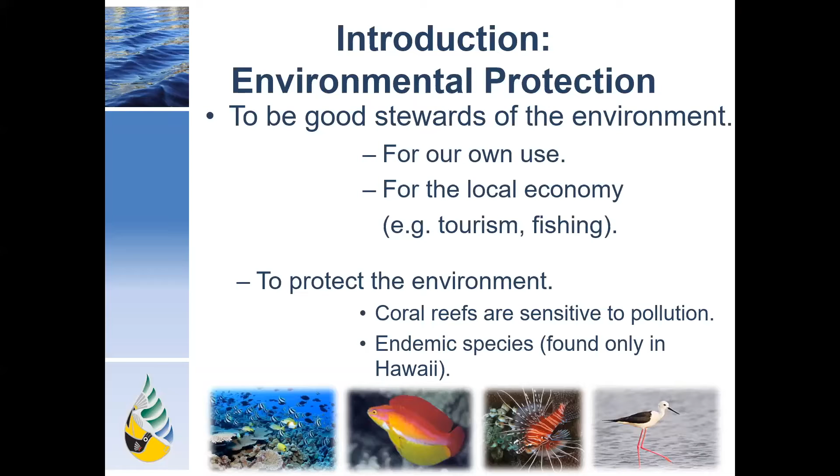It is important for all of us to ensure that best management practices are properly implemented to minimize the potential pollutants generated during construction and post-construction activities, and to prevent them from entering our state waters. Clean water is of vital importance to our use, as well as to the fishing and tourism industry. It is our responsibility to protect wildlife and species found only here in Hawaii. Our ultimate goal is to ensure that our coastal waters are clean for every living being to enjoy.

Here is a quick rundown of our basic regulatory requirements at Harbors, which include the Clean Water Act and related CFR by feds, Hawaii Administrative Rules 11-54, 55, and related statutes, and the NPDES permit issued to Harbors Division as of today. These regs and permits, along with the consent decree, are the primary drivers for Harbor's SWMP program.

The NPDES permit issued to Harbors requires the development, implementation, and enforcement of our own SWMP, covering the 6 minimum control measures listed on this slide. Today's training will be focused on construction site runoff control and post-construction stormwater management for new development and redevelopment. Both program manuals are available online, and here is our web address.

Also, you can find it in our booth listed under this virtual conference. Showing below is a snippet from our website listing the menus, checklists, and forms tailored for Harbor's construction and post-construction programs.

Following the definition in HAR 11-55, construction activities are any activities that disturb the land, including but not limited to clearing, grading, and excavation. It also includes construction supporting activities such as stockpile, borrow areas, and staging sites.

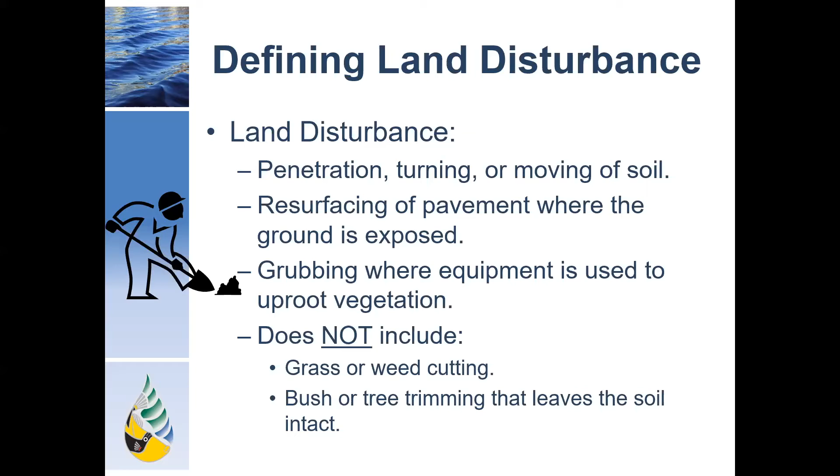Land disturbance means penetration, turning, moving of the soils, or resurfacing of pavement with exposure of the base course. This may include construction roads, staging areas, stockpiling, grading, grubbing, and demolition. Please note that this does not include grass cutting or tree trimming.

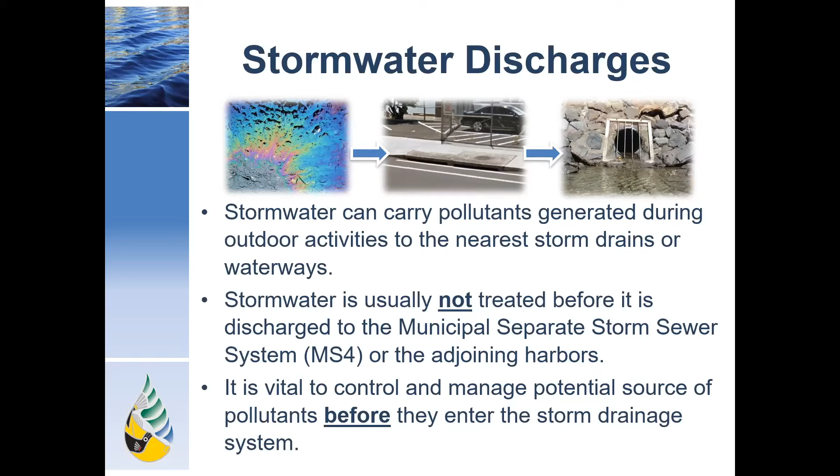So how exactly can construction activities potentially impact the environment? This occurs when stormwater runoff carries pollutants from the construction site to nearby storm drains or waterways. Once the stormwater has entered the storm drain system, it flows and discharges directly to the adjoining state waters, for example, harbors. Therefore, it is essential to control and manage the potential sources of pollutants before they enter the storm conveyance system. One potential source of pollutants is what is called an illicit discharge.

An illicit discharge is any non-stormwater discharge that can pose a risk to the environment. An easy way to remember is that only rain belongs in the drain. The picture on the slide provides some examples of illicit discharge that should be eliminated, such as oil sheens or washed paint product and sediment.

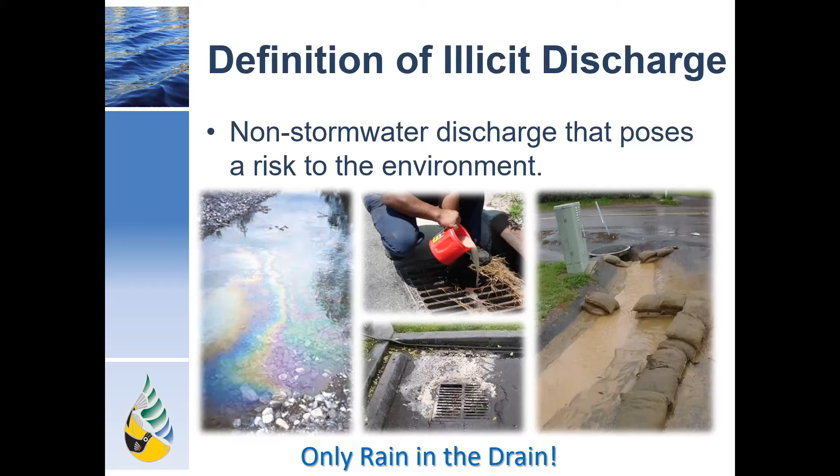Common pollutants from construction sites can include sedimentation from erosion and excavation, vehicle fluids from equipment used on site, and chemicals and aggregates stored on site. Also, some other waste from portable toilets, concrete washout, and littering.

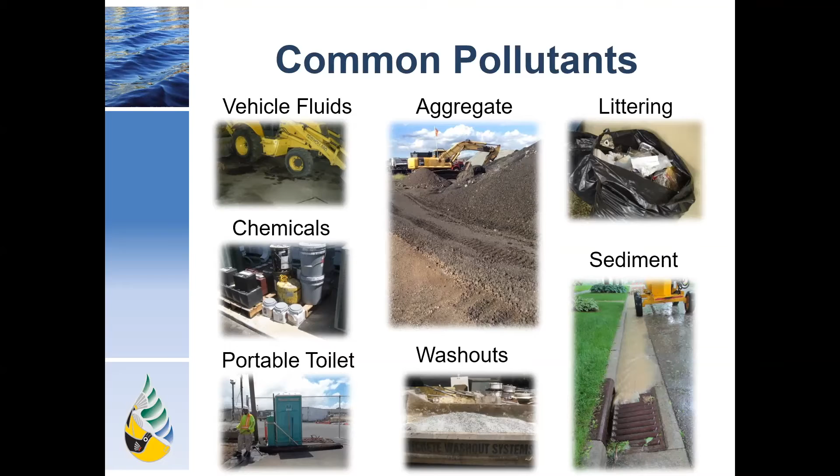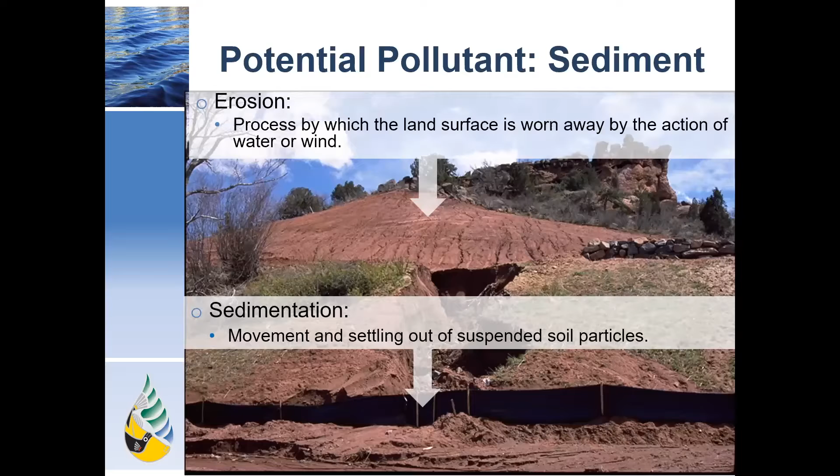Sedimentation is one of the most common pollutants found in our waterways. It can be generated through surface soil erosion or in situ soil excavation. A construction project may have both short-term and long-term impact to the environment. Without proper BMP implementation, a significant amount of sediment can be discharged - that is about 35 to 45 tons per acre per calendar year versus only 1 ton for well-grassed areas.

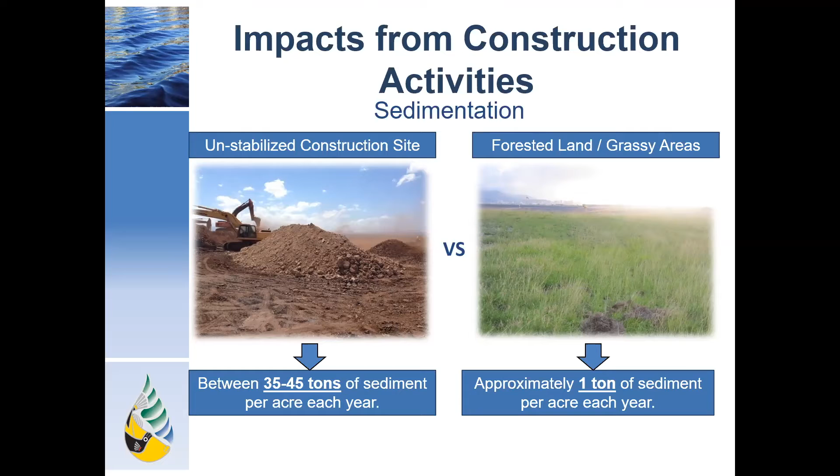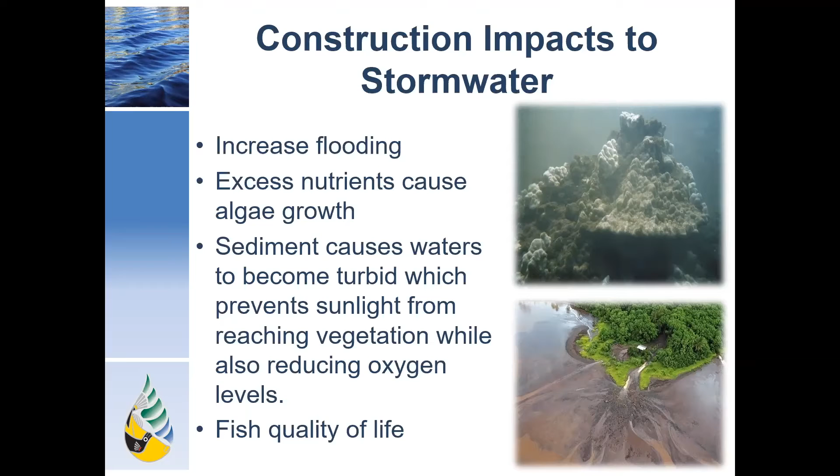If not properly contained, sediment may fill up storm drains and catch basins, which are designed to carry stormwater away from roadways and the ground surface, causing localized flooding. Also, excess nutrients from the sediment can increase algae growth. It can also cause the water to become turbid, preventing sunlight from reaching corals and reducing oxygen levels, which can impact marine life.

As discussed in one of the previous slides, the NPDES program is part of the Federal Clean Water Act, and its overall goal is to regulate the discharge of pollutants from point sources, and now also including non-point sources, to the receiving waters of the United States.

In our state, its administration has been delegated to DOH under HAR 11-55. If your project would disturb 1 acre or more, or is part of a larger common plan of development or sale, it's very likely that your project would be subject to this program requirement.

HAR 11-55 Appendix C outlines the requirement for a regulated construction site. First, no later than 30 days prior to the start of construction, a Notice of Intent Form C, or NOIC, with a SWPPP must be submitted to DOH via the e-permitting portal.

This requirement is usually completed during the project design phase. Upon awarding, the contractor shall review and update the SWPPP and submit a copy to Harbors for review and final acceptance. Then, following the permit issuance, the project owner or duly authorized representative must notify DOH Clean Water Branch no later than 7 calendar days before the start of construction activities.

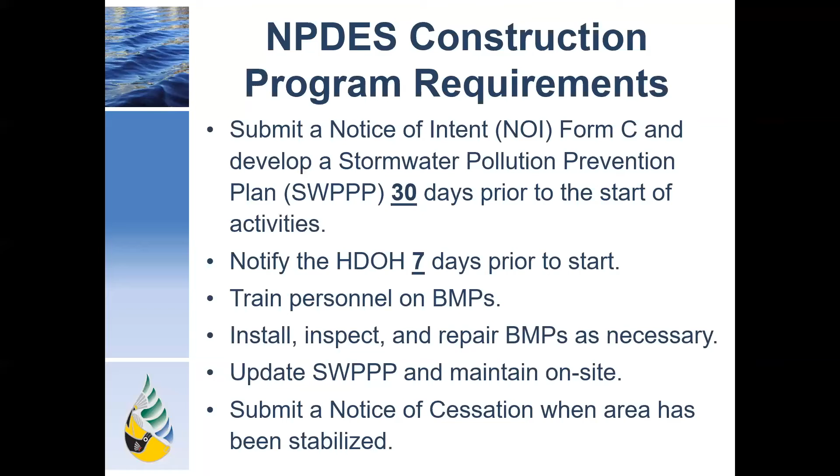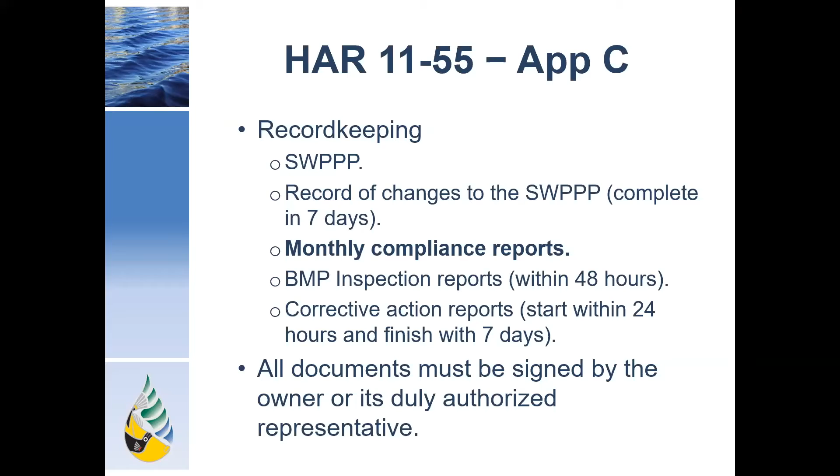When it comes to record keeping, the permittee must keep all necessary documents on site, which includes an NPDES permit, the SWPPP, records of changes to the SWPPP, a monthly compliance report, contractor's self-BMP inspection report, and the corrective action report, if any. All these documents must be signed by the duly authorized representative. Just remember, record keeping is key.

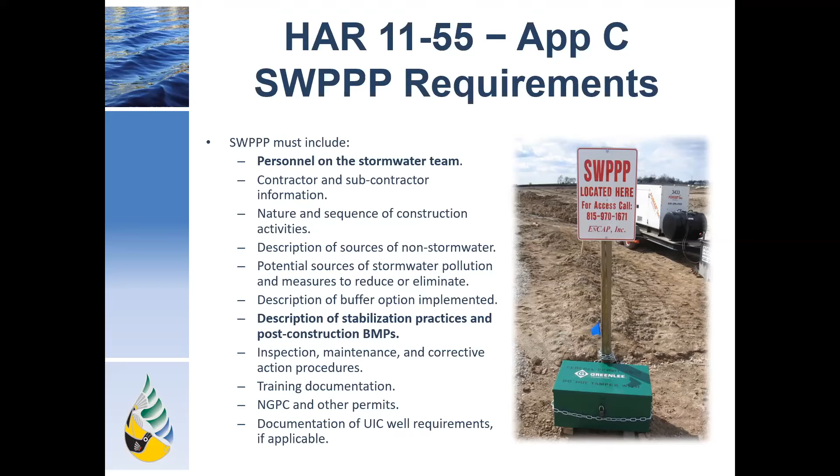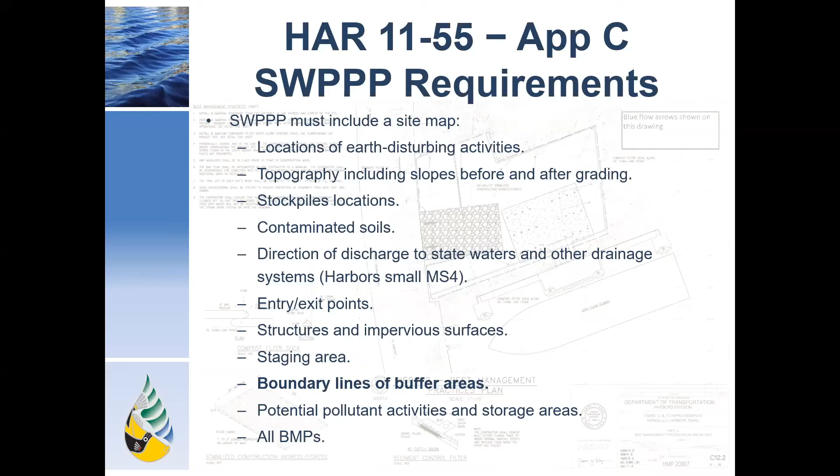HAR 11-55 Appendix C also outlines specific requirements to be included in the SWPPP, such as the ones shown on these slides. A site map should detail the locations of potential pollutants, such as disturbed earth, stockpiles, and staging areas, which could be used for equipment and chemical storage. There's also a relatively new requirement to indicate the boundary lines for the buffer area.

HAR 11-55 Appendix C also details how frequently a contractor must conduct self-inspections. First, you must determine whether the stormwater from your site discharges to impaired water bodies or not. If so, such as a portion of Honolulu Harbor, the inspection must be performed once every 7 days and within 24 hours of any rain event of a quarter-inch or more over a 24-hour period.

This means that the stormwater team is required to monitor and record the daily rain gauge readings on site, or from the nearest NOAA weather station, which is available online.

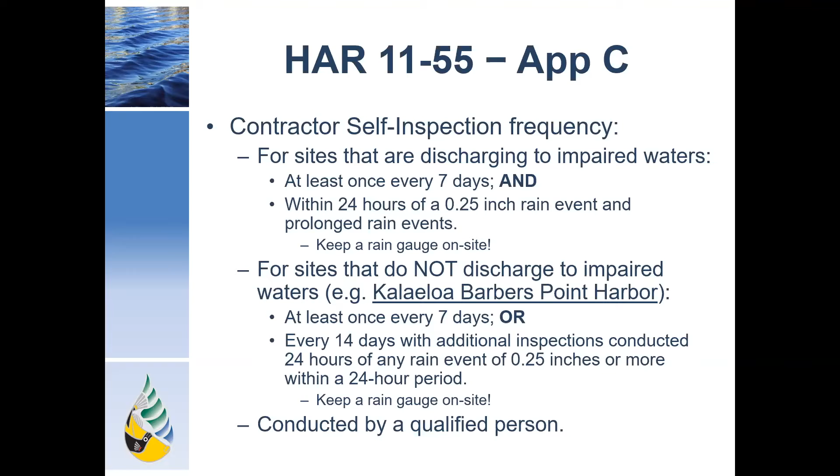If the site is discharging to a non-impaired water body, such as Kalaeloa Barbers Point Harbor, inspections are required to be conducted either weekly or once every 14 days, with additional inspections conducted within 24 hours of any rain event of a quarter-inch or more that occurs within a 24-hour period.

11-55 also has specific requirements for correcting deficiencies or potential violations that could lead to a violation of water quality. The deficiency is required to be corrected immediately within the same day it is observed. If the deficiency cannot be corrected immediately, the reasons for the delay must be documented.

If significant repairs are required, the time frame can sometimes be extended to 7 days. You will also need to complete the corrective action report within 7 calendar days from the time of discovery.

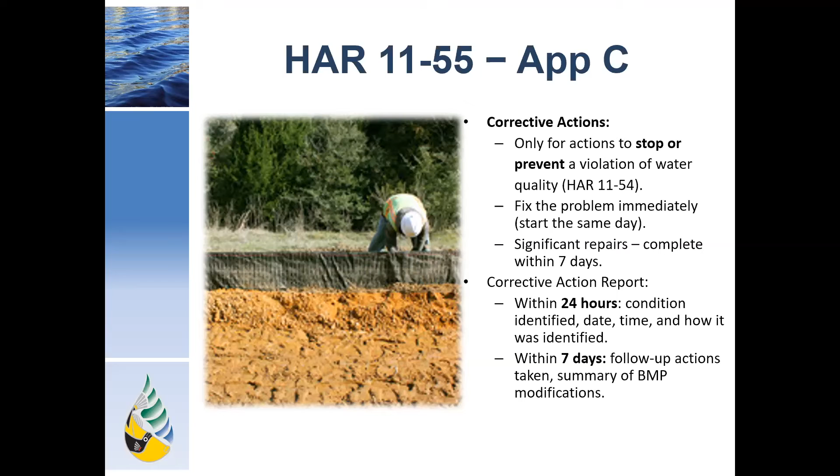DOH also requires that stabilization measures be implemented immediately whenever earth-disturbing activities have stopped. The stabilization must be completed within 14 days when it has initiated. But if the work is near an impaired water body, such as Honolulu Harbor, then it needs to be completed within 7 calendar days.

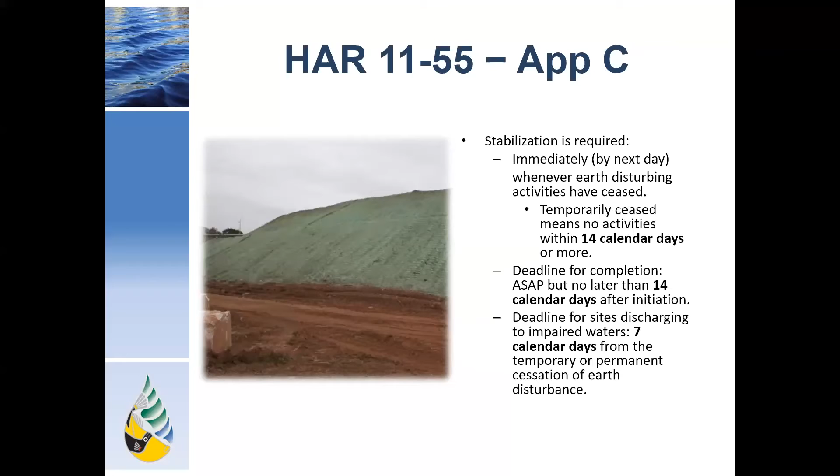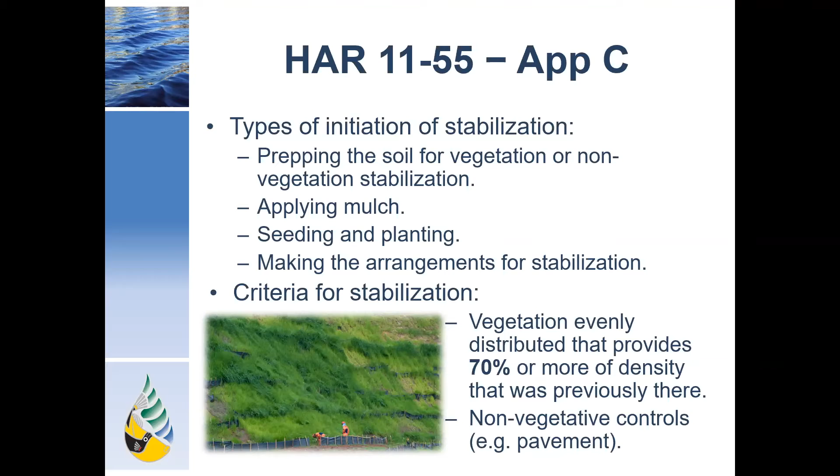Any circumstances that prevent this project from meeting this requirement should be documented. The time frame for stabilization does not mean that the seed has to grow within 7 calendar days, but steps should be taken to initiate the stabilization, which include preparing the soil for vegetation, applying mulch, seeding, or just making arrangements for stabilization.

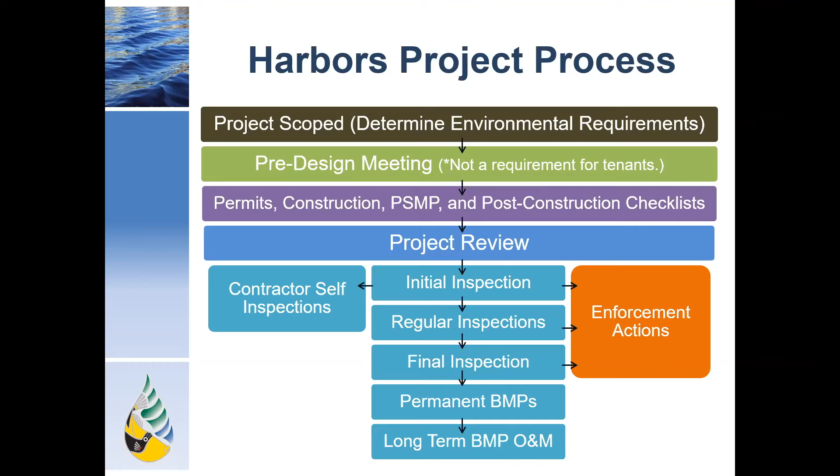A typical project under Harbor's jurisdiction will follow the process shown on the slides: project scoping, design, project review, construction, and then long-term operation and maintenance if necessary. We will review these phases in detail in the next few slides with a focus on environmental requirements.

During design phase, the project shall be scoped by the design engineers, and the relevant environmental requirements will be identified. When necessary, a pre-design meeting will be held, and all permits and applicable Harbor's forms should be completed by the design engineer.

These forms include notification forms for projects less than 1 acre, and for projects subject to NPDES and NOIC, the design engineers would need to complete the construction design and post-construction design checklists, along with a post-construction stormwater mitigation plan.

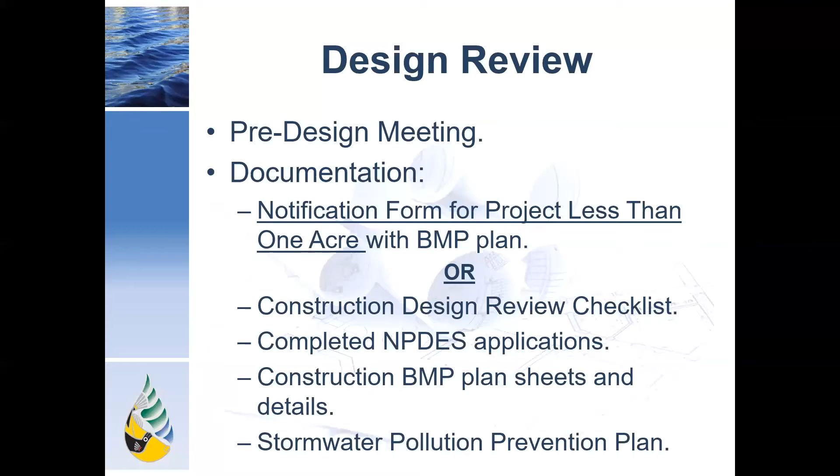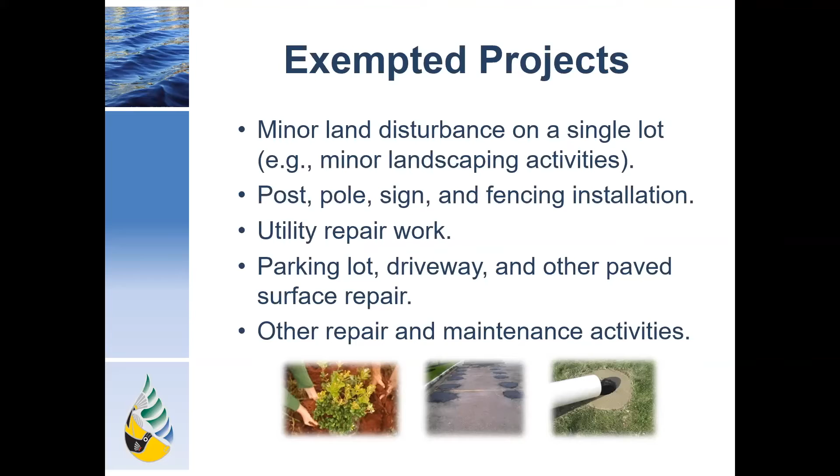Harbors have exempted certain types of projects from the program that have shown to have minimal impact to the environment. This includes some minor land disturbance on a single lot, post, pole, sign, and fencing installation, utility repair works, surface repair projects, and other maintenance activities.

Here is a snippet of Harbor's construction site design review checklist, which is available on Harbor's stormwater management website.

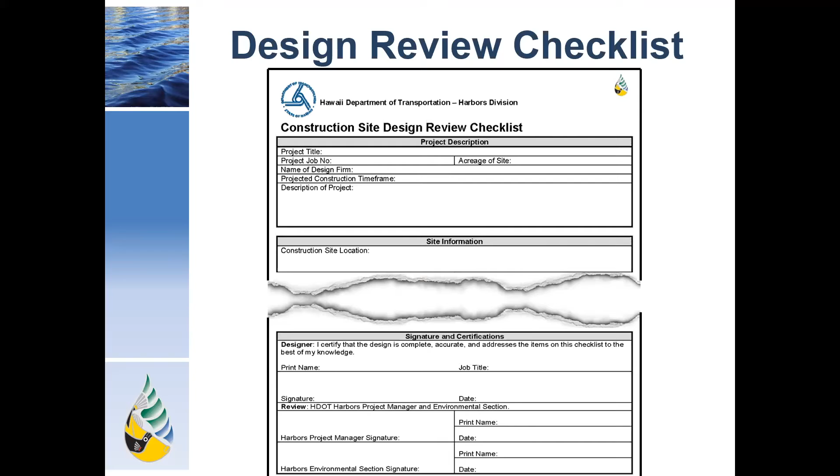Following the completion of the design phase, the project will go out for bid through public solicitation. Following the selection, the construction contractor would then work on updating and finalizing the SWPPP based upon their specific information and construction means and methods.

The revised SWPPP shall be submitted to Harbor's project manager or project engineer, who will then provide the SWPPP to Harbor's environmental section for review. Once accepted, the contractor can commence installation of BMP measures, which must be inspected for full acceptance before any other construction activities are allowed to start on the site.

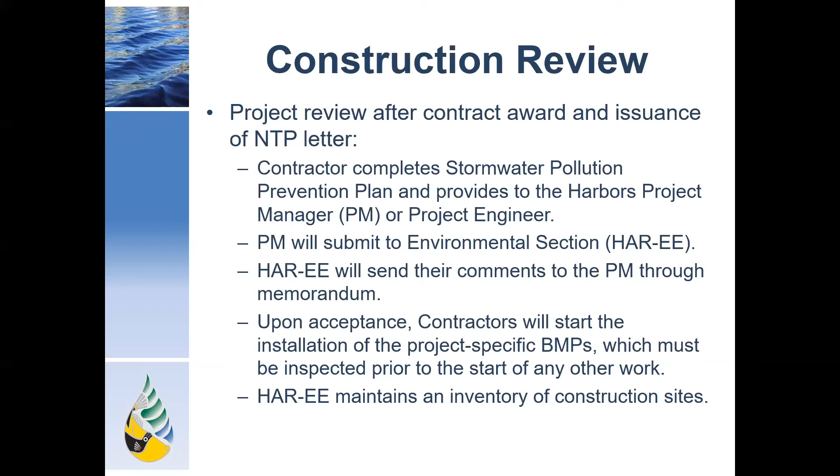If a project disturbs 1 acre or more and requires an NPDES permit, the SWPPP needs to be prepared fulfilling the requirements of R11-55 Appendix C as well.

BMPs are required to be implemented during construction activities in order to minimize impact to the environment by managing and controlling potential pollutants at their sources. They are structural devices or systems, or just procedures and practices, used to mitigate the discharge of potential stormwater pollutants. It's important to keep in mind that drain inlet protection is your last line of defense, so additional BMPs should be implemented to assist in preventing illicit discharge from occurring.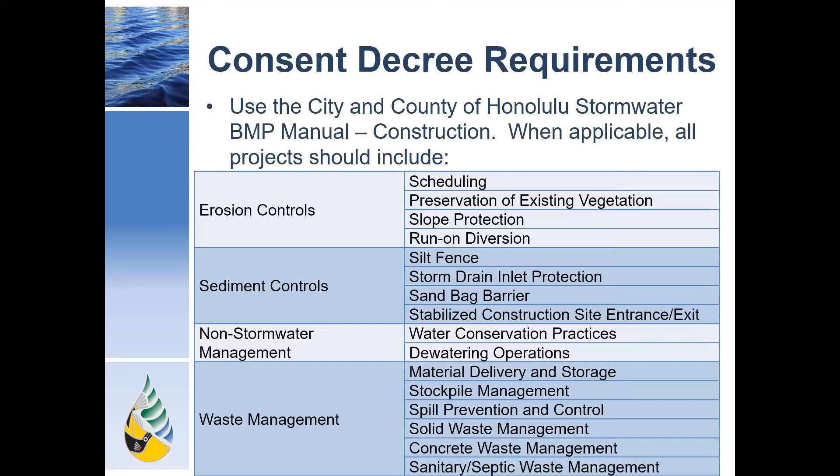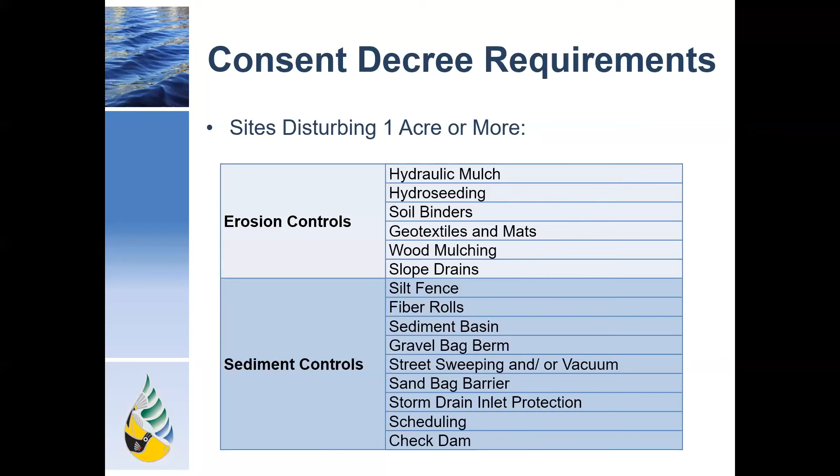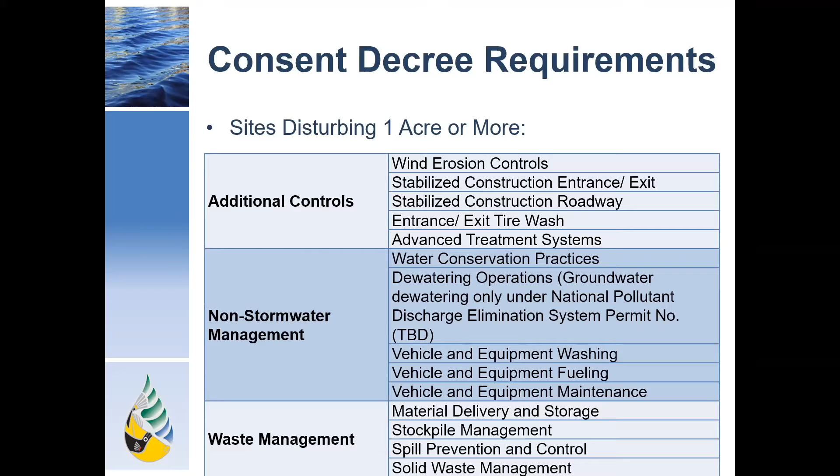Our program also includes a list of BMPs to be implemented on site for projects that disturb 1 acre or more, such as sediment and erosion control BMPs listed on these slides, and some additional control BMP measures, such as wind erosion control and utilization of advanced treatment systems, and also other non-stormwater and waste management practices.

If you're working on a roadway paving or repair project, please ensure to implement the BMPs listed on this and the next slides.

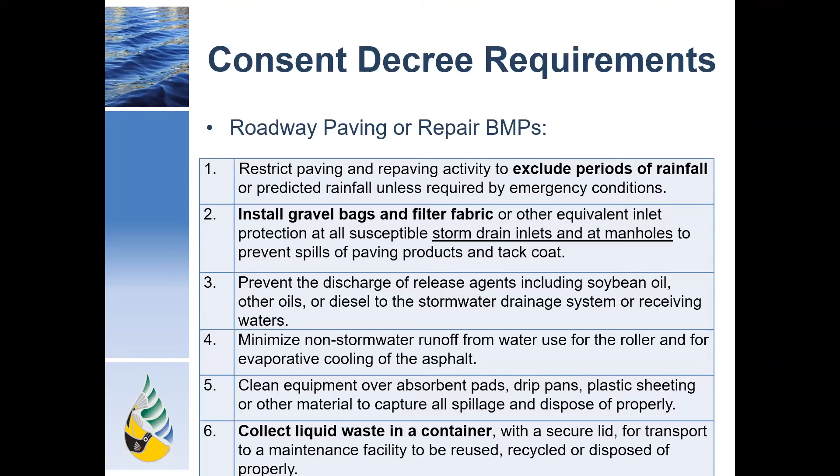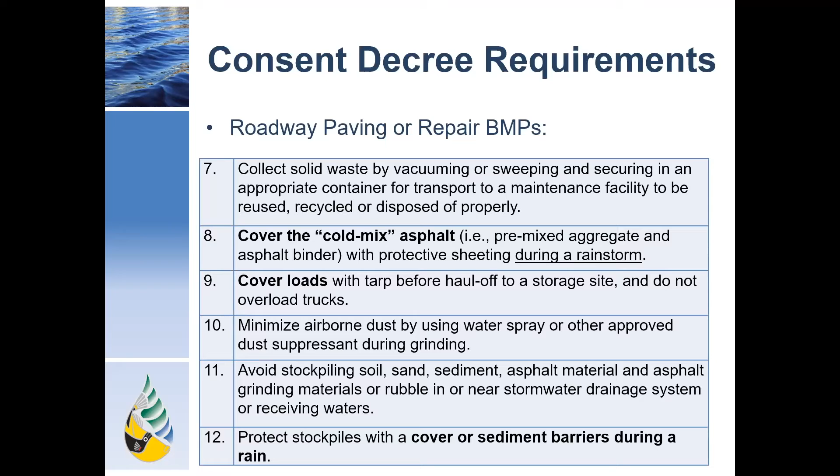Next, we will discuss the Harbor stormwater BMP inspections as well as expectations of the site during active construction phase.

Harbor's stormwater program requires inspections of non-exempt construction sites. These are conducted to identify potential or active discharges of pollutants and ensure these issues would be corrected proactively to stay in compliance and to avoid being cited by the corresponding regulatory agency.

All Harbor's inspections would be conducted by a qualified inspector. The purpose of initial inspection is to make sure all the proper BMPs will be installed, and any deficiencies or potential violations noted during the inspection should be corrected before the contractor can commence any further construction activities.

Once the construction work starts, Harbors will conduct recurring inspections for the duration of the project. This will occur once every 2 weeks during the wet season, which is from October to March, and then once every 2 months from April to September, which we call the dry season.

Deficiencies and potential violations noted during these recurring inspections may lead to enforcement actions if not properly corrected. Usually a copy of the inspection report will be provided to the contractor within 5 calendar days.

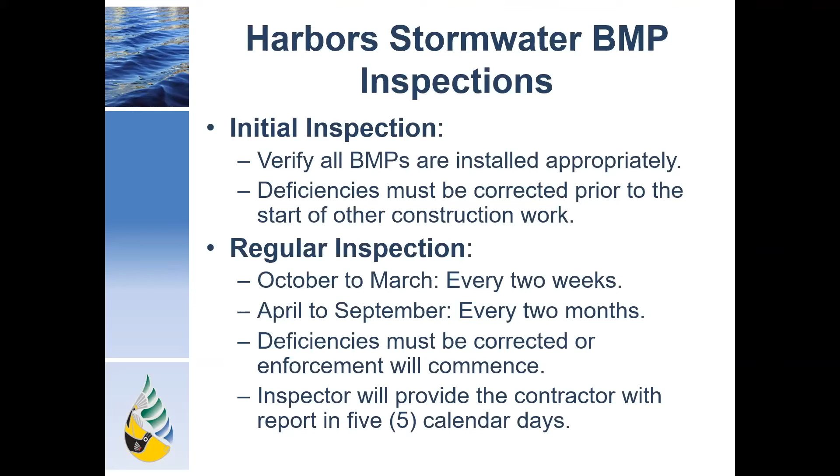A final inspection will occur once the construction work is completed and the site is permanently stabilized. At the same time, this inspection will serve to ensure that permanent BMPs are properly installed. Deficiencies and potential violations noted during the final inspection must be corrected prior to closing the project. Final payment can be withheld until all corrective actions are completed.

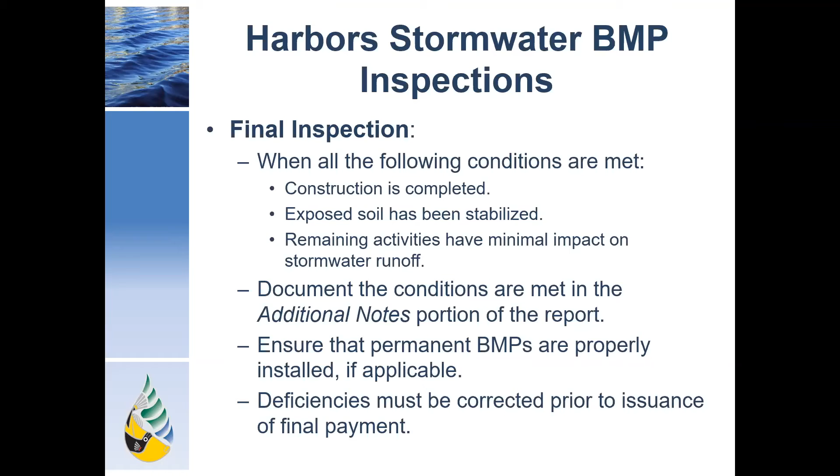The following slides will discuss some common findings from inspections.

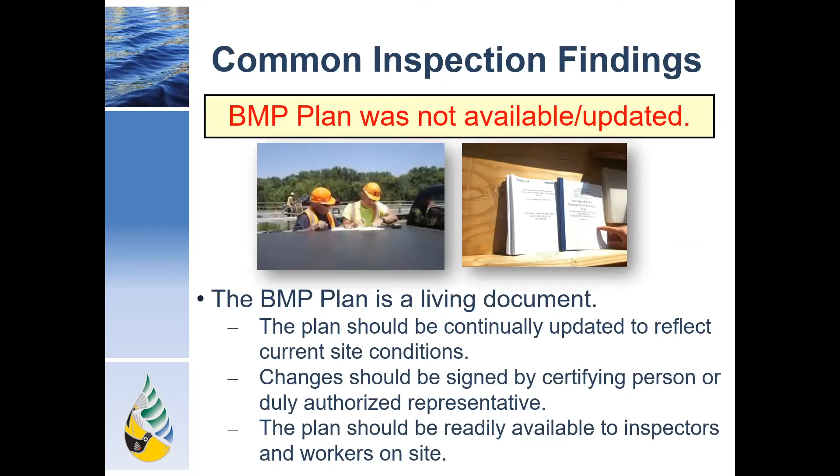The first one is that BMP plans are not available or updated. These site-specific BMP plans usually provide basic information about the project site and identify which BMPs will be implemented on site. They should be updated when necessary and kept on site or at an easily accessible location to make them readily available for on-site stormwater teams and inspectors.

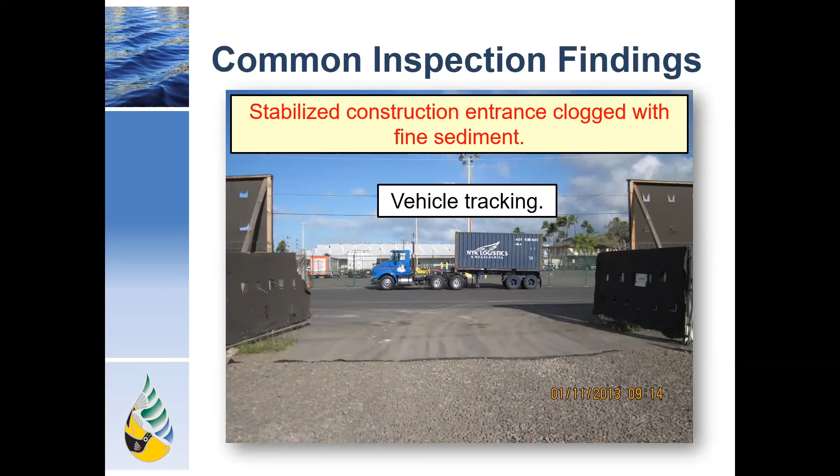In general, the stabilized entrance should consist of a minimum of 50 by 30 feet and be covered with 3 to 6 inch diameter aggregate over a geotextile fabric. Maintenance may need to be conducted regularly throughout the life of the project to remove accumulated sediment. Shown here is just one type of stabilized construction entrance; there are other types that contractors can also consider incorporating into the project.

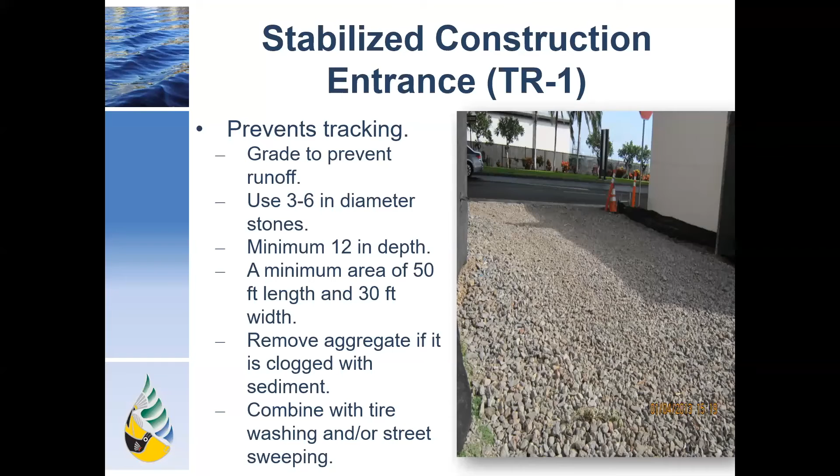Silt fences can be used to control sediment from a construction site. However, they must be properly installed and maintained. If not well maintained, sediment may be carried off-site and result in an illicit discharge.

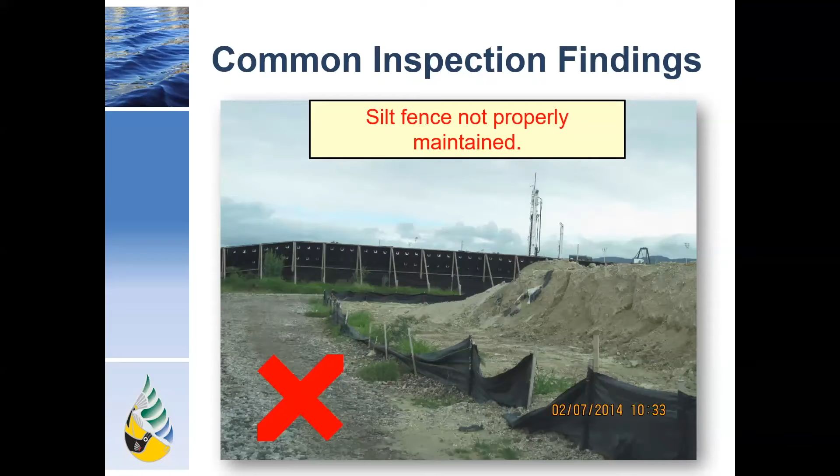At a glance, a silt fence should be properly installed and maintained by setting the posts on the downstream side of the fence every 6 to 8 feet. The fabric should be stretched tight, and the fence should be embedded in the ground approximately 12 inches to secure the bottom of the fence.

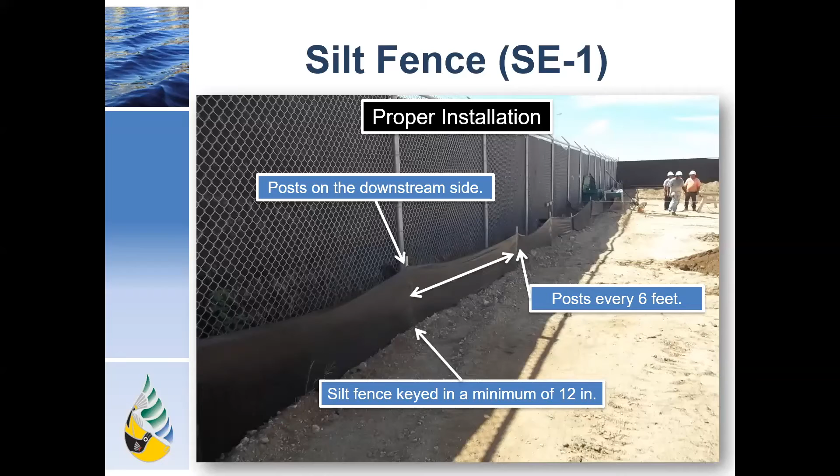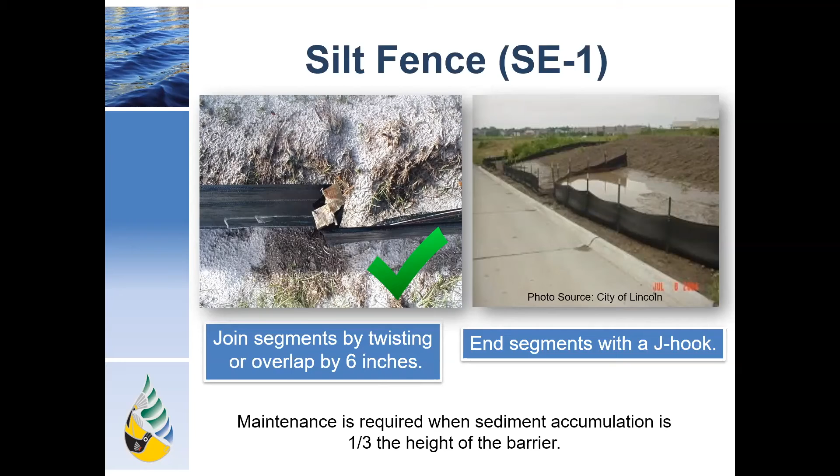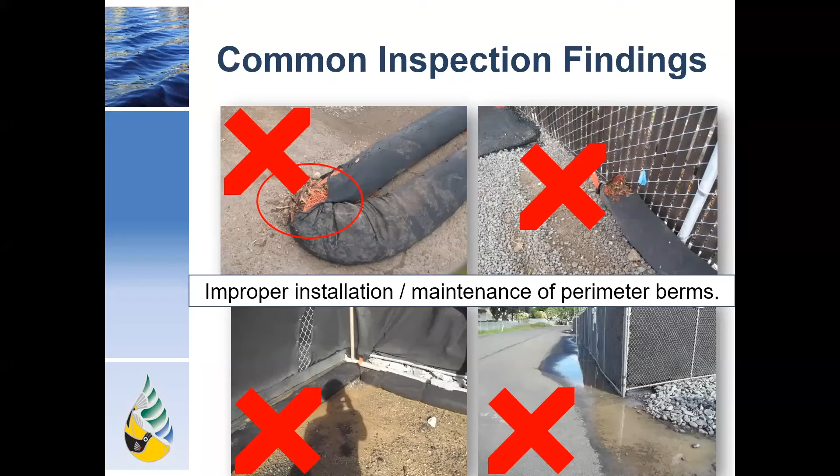The pictures at the top show how deteriorated or decomposed biosocks can sometimes contribute pollutants if not replaced or repaired promptly. Basic rules for using biosocks include: they should be placed on the ground in close contact with the ground surface, ends of the socks must overlap a minimum of 6 inches, and ends of the berm should be turned up the slope to aid in containing sediment. Accumulated sediment must be removed when it reaches 1/3 the height of the berm, and they should be maintained as necessary.

Erosion control mattings can be used on site to stabilize disturbed soil until vegetation can be established. Geotextile must have full contact with the ground surface to be truly effective, which may require the removal of large rocks and other debris that could lever the mat off the ground.

The mat must also be properly anchored. This involves trenching in the mat at least 6 inches at the top of the slope, overlapping sections of the mat by 2 to 3 inches, and stapling the mat every 3 feet.

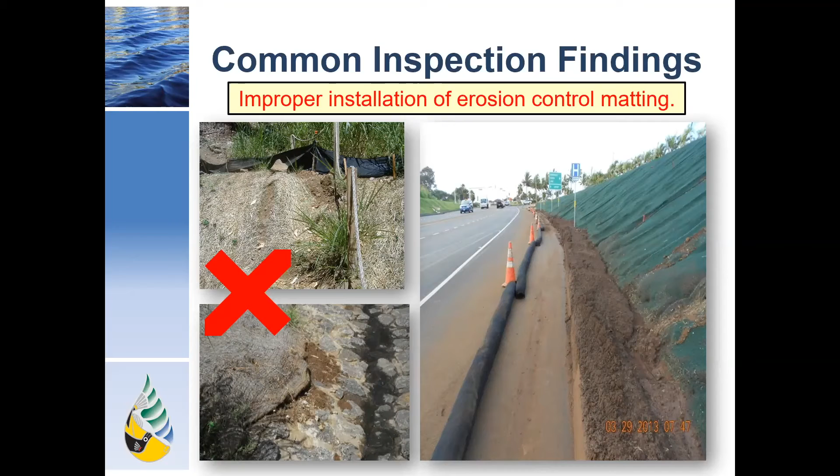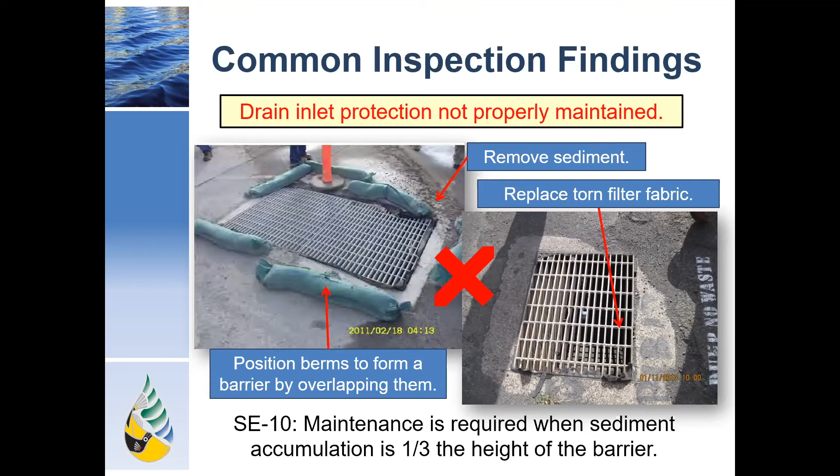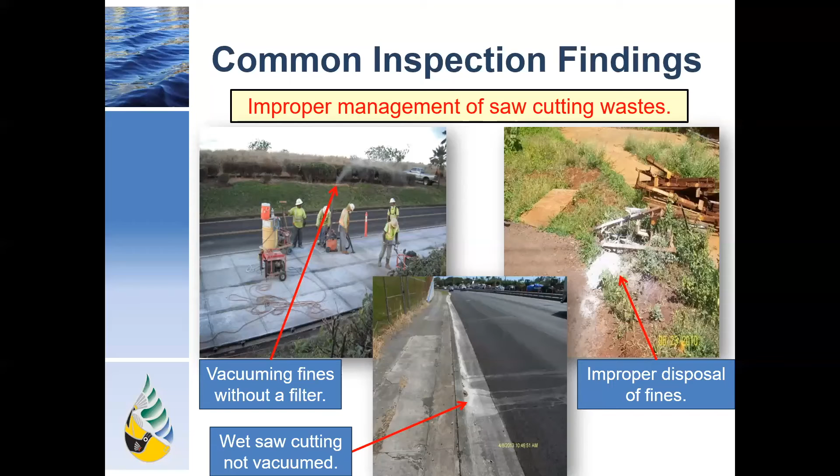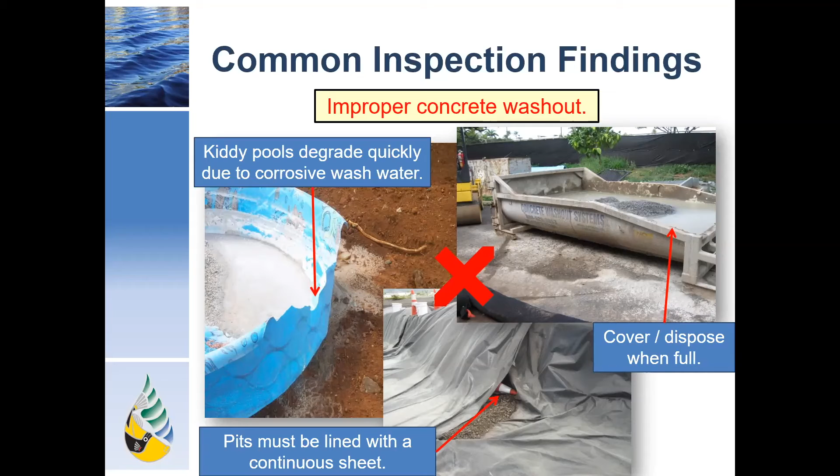It is important to remember that the containment may only be filled up to 75% capacity of the container, and the temporary concrete washout facility should be maintained to provide adequate holding capacities with a minimum freeboard of 4 inches for above grade facilities and 12 inches for below grade facilities.

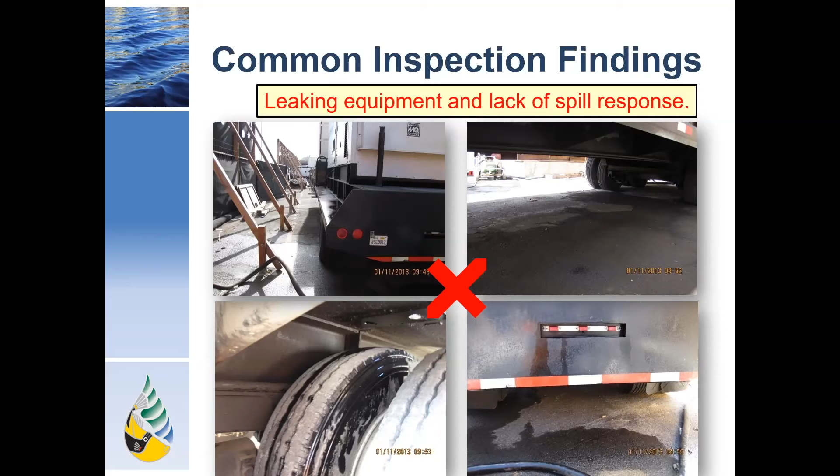Spills and vehicle leaks are a common source of pollutants on the construction site. As shown in these photos, petroleum products can easily be carried away when it rains. So vehicles and equipment should be regularly inspected for any potential leaks, and if a leak is observed, ensure you use drip containment to contain any spill or leak. All construction workers should be trained on proper spill response, a spill kit must be kept on site and properly stocked, and spills should be immediately reported to Harbor's project manager or the project engineer.

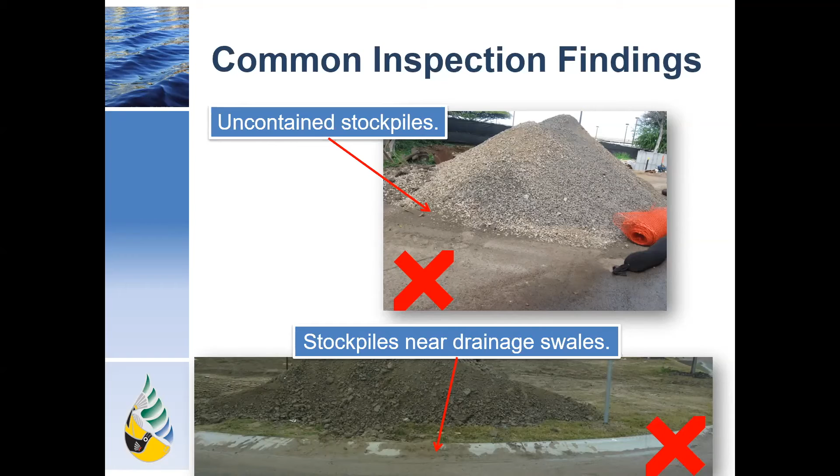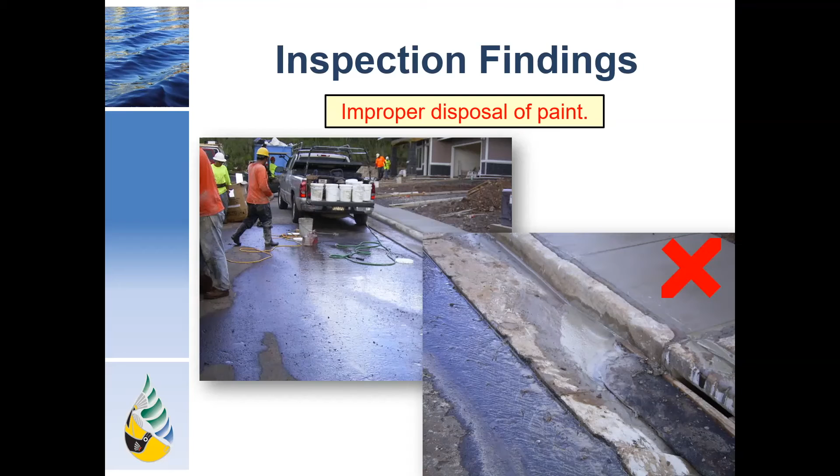Hazardous materials must be stored properly on site. In particular, liquid containers of 55 gallons and above should require secondary containment. They should also be inspected regularly to ensure that they're in good condition and properly labeled or marked. It is preferred that hazardous material be stored in a covered area to minimize exposure to stormwater.

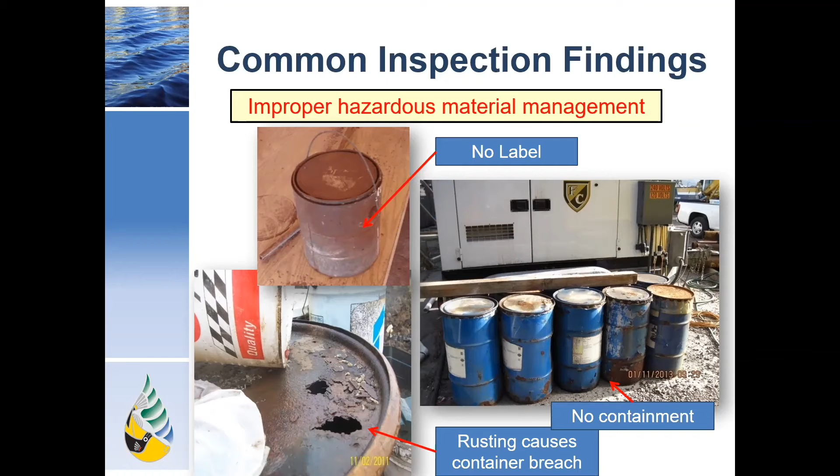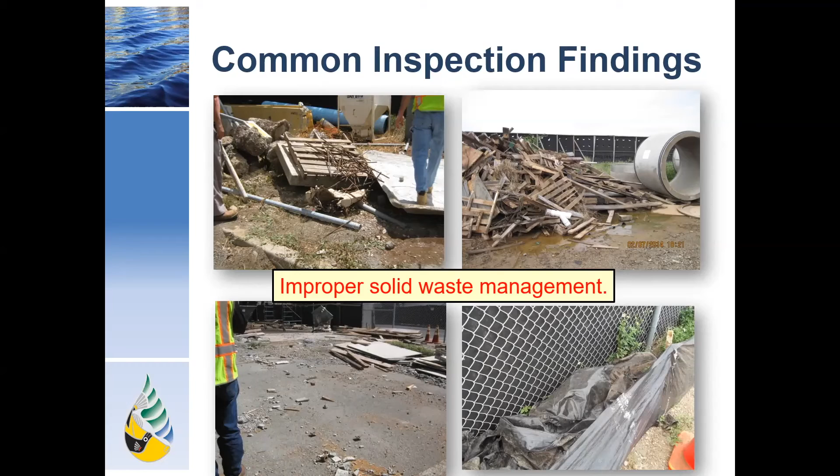All right, improper solid waste management. This is related to housekeeping and waste management - trash and debris throughout the construction phase can be picked up by stormwater and contribute as a pollutant to adjacent harbor waters. Make it a regular practice at your site to clean up debris at the end of each working day. Some good practices include removing debris from the site regularly, placing it in a watertight dumpster, locating your dumpster 50 feet away from the waterway, and segregating hazardous waste from recyclable items.

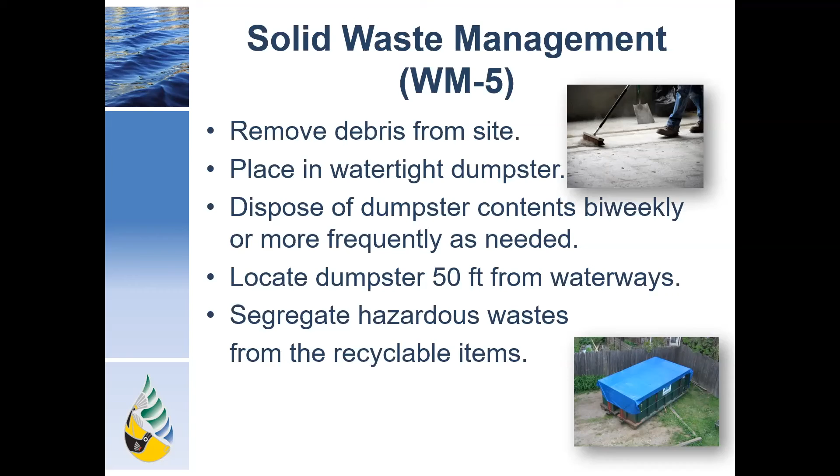Throughout the construction phase, enforcement actions can be implemented when necessary to ensure corrective actions are completed. The enforcements will reference Harbor's SWPPP and construction contractor document, Hawaii's Revised Statutes, and also HAR. Recently, Harbors also completed an enforcement response plan, and we will reference that particular document in the future as well.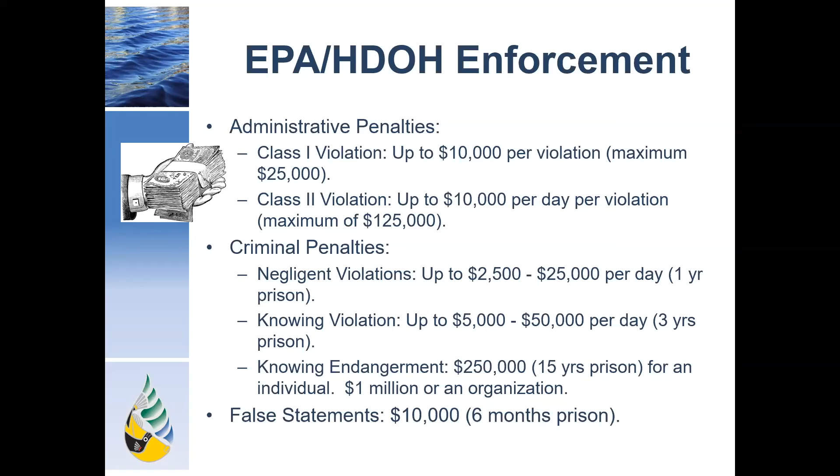Once a regulatory agency, such as DOH, begins their enforcement, there may be specific penalties associated with each violation. This kind of violation can be compounded each day the violation occurs. The potential for penalties shown on this slide can be totally avoided if all parties working together on the construction project follow the requirements in our program and apply the appropriate BMPs.

Okay, all right, moving on to Harbor's post-construction program. Our post-construction program is considered a complementary component to the construction site runoff control programs. So through the next few slides, we'll discuss requirements when providing guidance for specific project planning, selection, and designing of post-construction BMPs to fulfill the NPDES permit and Harbor's SWMP requirement.

Post-construction BMPs are of equal importance because they will continue to address potential stormwater pollutants long after the construction project has been completed. Another important thing is that if you do include the post-construction BMP, it should be coupled with an operation and maintenance plan to ensure that it continues to function effectively for the life of the system.

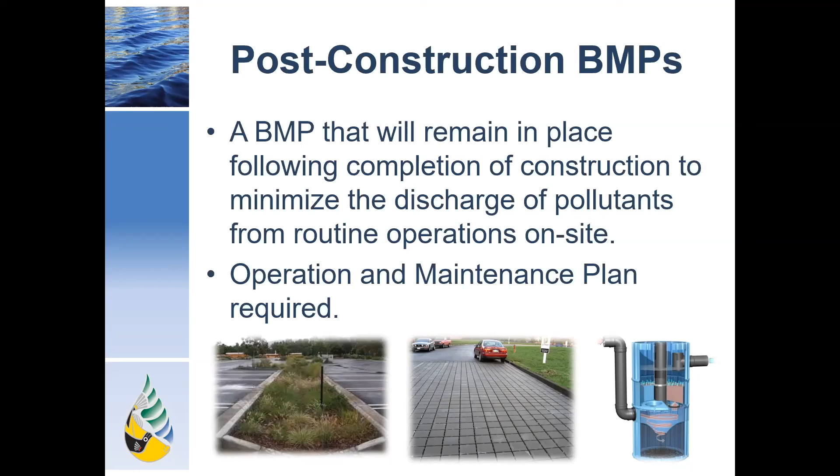Post-construction BMPs must be considered and evaluated for projects disturbing land of 1 acre or more. Here are some exceptions, which include projects only involving maintenance, re-roofing, interior work, or some kind of utility work, and also replacement of damaged pavement.

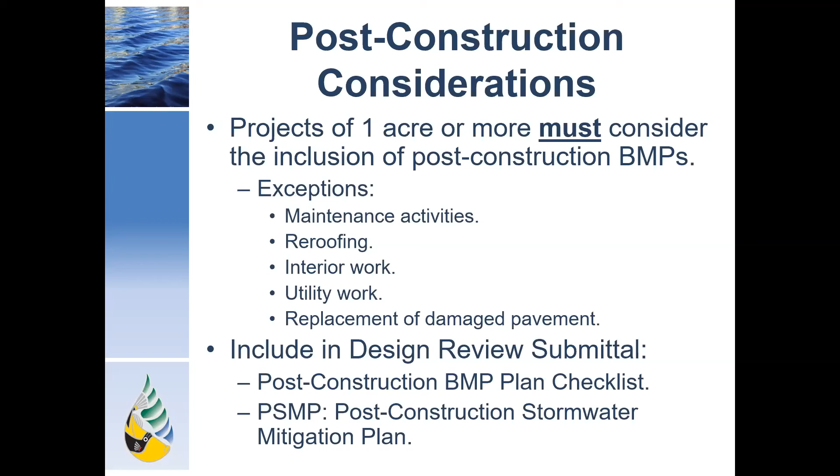Design engineers would submit the permanent post-construction BMP plan checklist and a post-construction stormwater mitigation plan to Harbor's environmental section for review. On this slide, it shows a portion of our permanent post-construction BMP plan checklist, and the full copy can be found on our website.

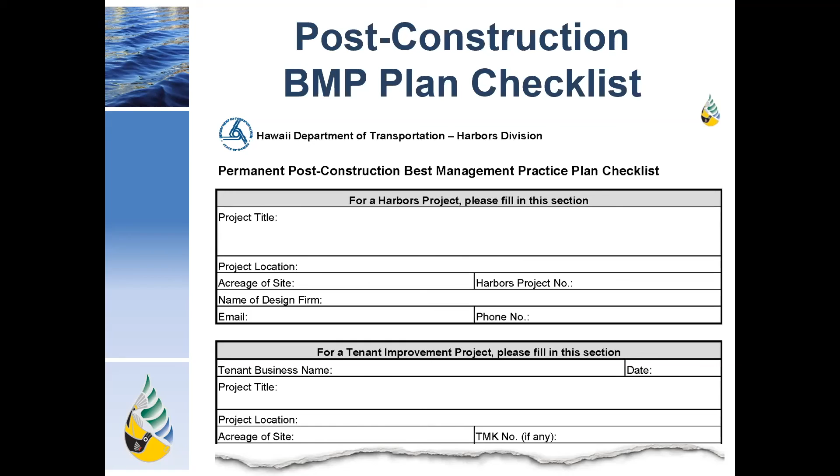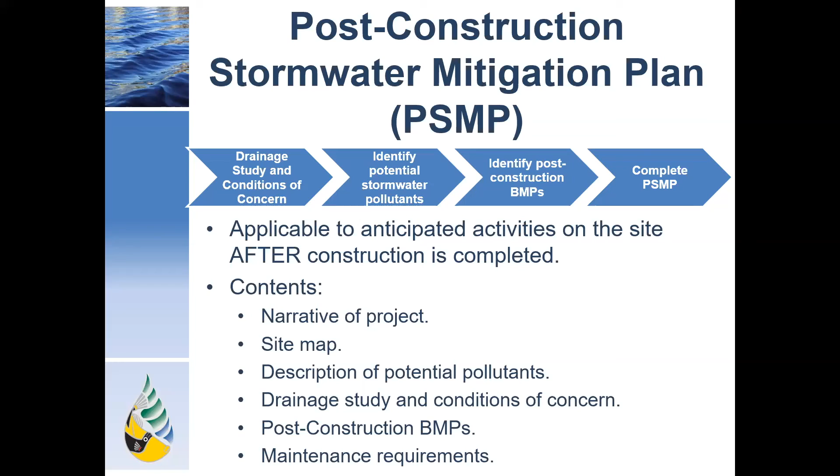The post-construction stormwater mitigation plan, or sometimes we call it PSMP, begins by completing an existing drainage study of the area. Then the designer will identify the source of potential pollutants that may be present after the site is constructed. Then all this information will be compiled together into a PSMP.

This table provides more guidance about the types of potential pollutants that may be expected based on the land use. For example, if a project involves an industrial development, like a container yard, the post-construction BMP would involve removing sediment, oil and grease, and dissolved metal, if applicable.

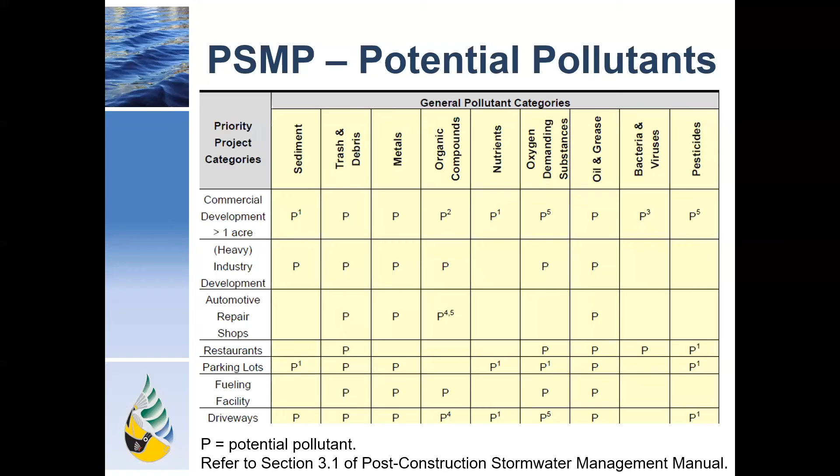So the types of post-construction BMPs are divided into 3 main categories, as a majority of us already know: low impact development, source control, and treatment control. LID must be considered and evaluated first, then followed by source control. And if neither are feasible, then treatment controls must be evaluated.

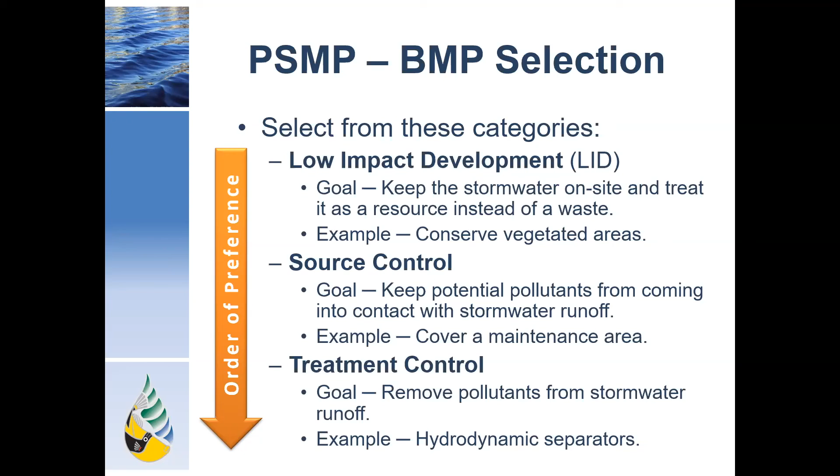For LID, it involves retaining the stormwater runoff on site and treating it as a resource rather than a waste. The goal of source control is to prevent potential pollutants from contacting stormwater, such as covering a maintenance area. Treatment controls attempt to remove potential pollutants from the runoff, and this includes BMPs such as hydrodynamic separators.

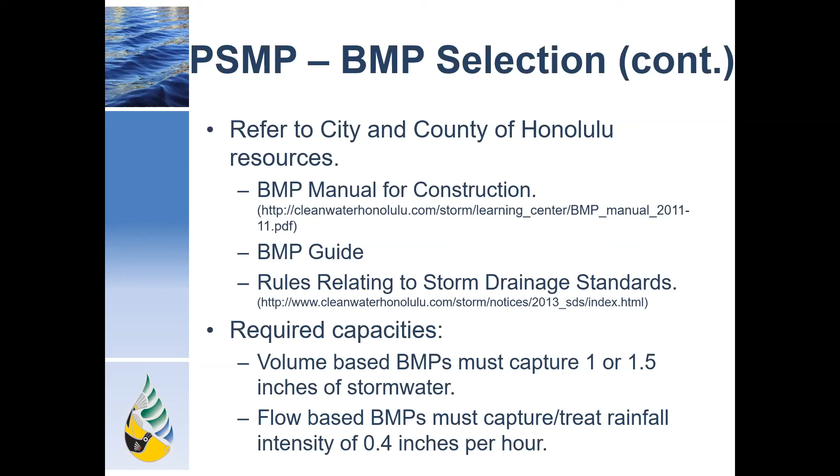Please feel free to refer to City and County of Honolulu's stormwater BMP guide and their rules relating to storm drainage standards. As a rule, volume-based BMPs must capture 1 or 1.5 inches of stormwater, and flow-based BMPs must capture and treat 0.4 inch of rainfall per hour.

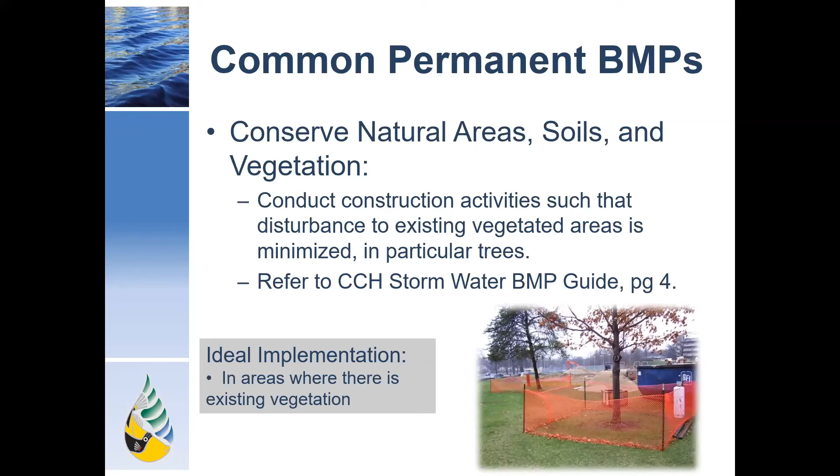This shows one of the common permanent BMPs, which is practical in areas where there is existing vegetation, and it should be marked off during construction if practical. Bioswales meet the objectives of both retaining the stormwater on site and providing some type of treatment. They're ideal for places like along the street or parking lot where stormwater needs to be drained from, and can also support vegetation growth.

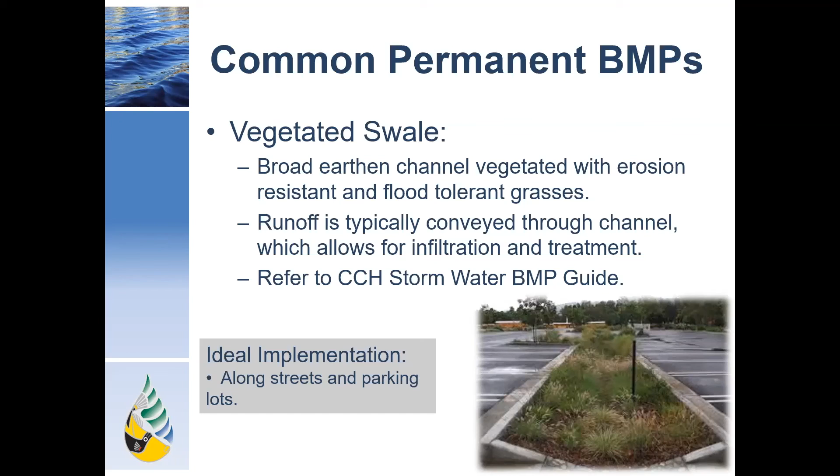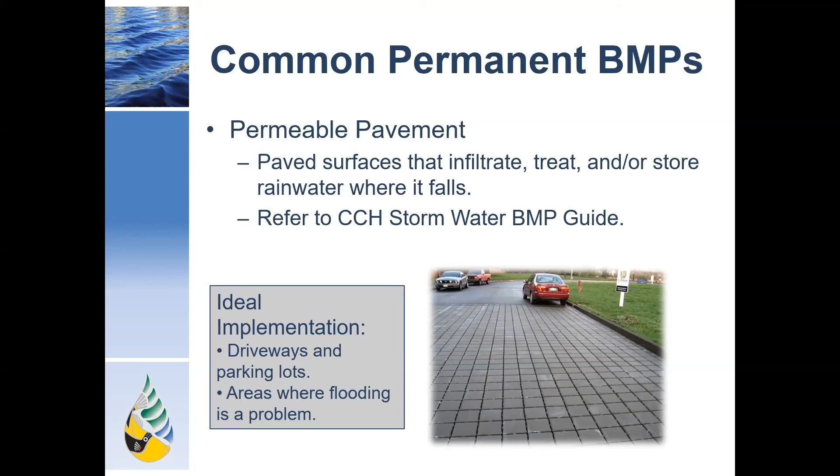Another BMP designed to retain the stormwater is called permeable pavement, which is designed to perform the same function that normal pavement does, but also allows the stormwater to infiltrate faster into the ground. This BMP is often used in paved areas such as driveways and parking lots.

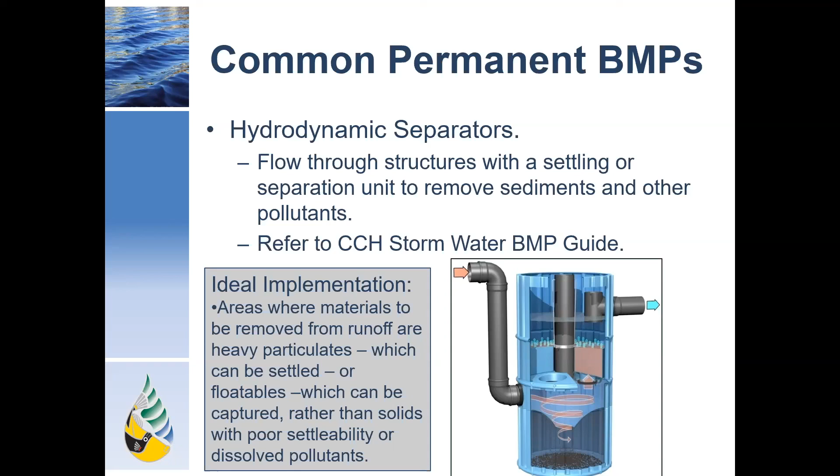Hydrodynamic separators are designed to treat stormwater as it leaves the site. As the discharge flows through the system, it allows the solids to settle out or flow to the top, and then clean water is discharged to the receiving water. This type of system works well in areas where solid waste is expected, such as public areas and loading docks, and is suitable for locations with relatively low groundwater levels.

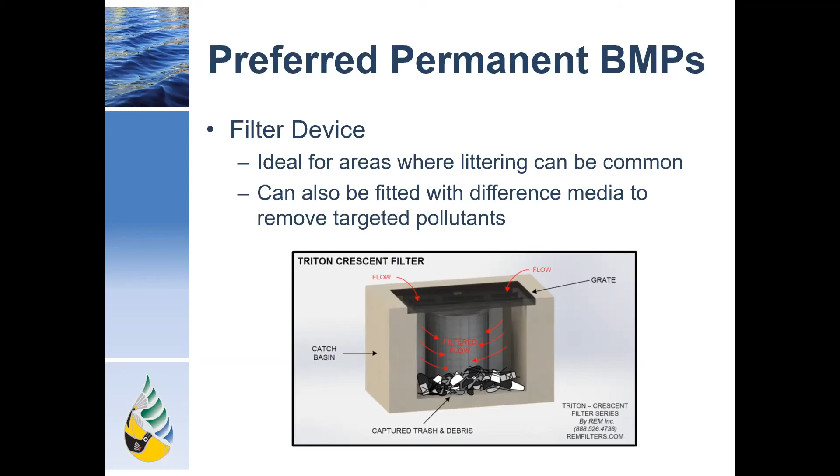Harbors has instituted its stormwater management program to protect our coastal waters and to achieve compliance at the same time. This is now a standard business practice for construction, and it should be followed by all involved.

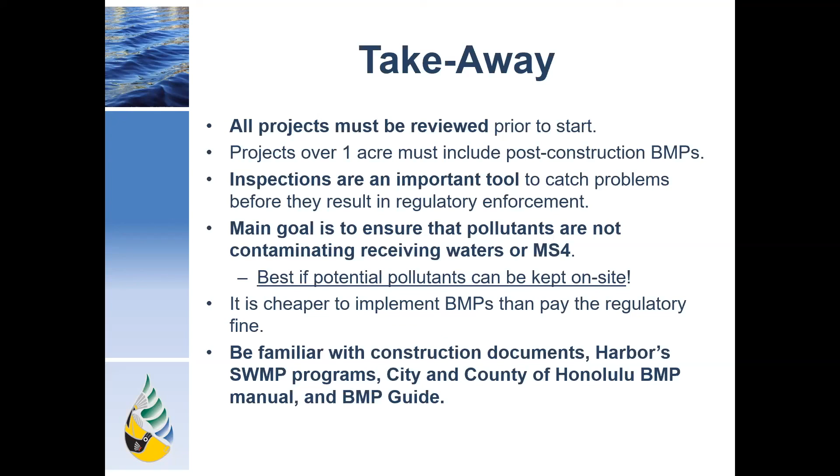There are a lot of references available, so please check our booth set up under this virtual conference. I think this should conclude Harbor's presentation for today, resonating with the theme for this conference: let's work together to protect the environment and protect our harbor waters. We appreciate it if you could also complete the training survey, which is shared at Harbor's booth as well. Thank you very much.